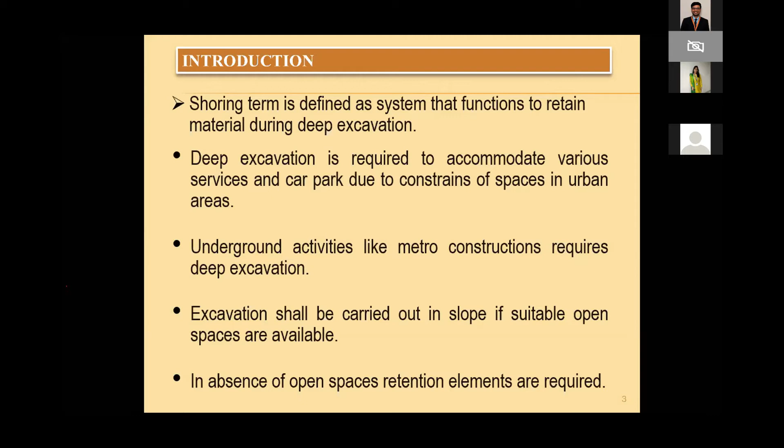As I said, in absence of that, retention elements are provided, means retention structures are required. So these are some of the photographs showing how the retention structures, or shoring as we call it, are required for the basement. You can see below the ground level it is excavated, and at the corner you can see this particular type of retaining structure.

Mostly they are in the form of a pile. In this photograph, this is called a panel. We'll discuss in detail. Here you can see this is mostly the structure in the metro stations, especially where we go deep and deep, and all the retaining structures' supports are provided from inside as struts. So these are some photographs showing the basements.

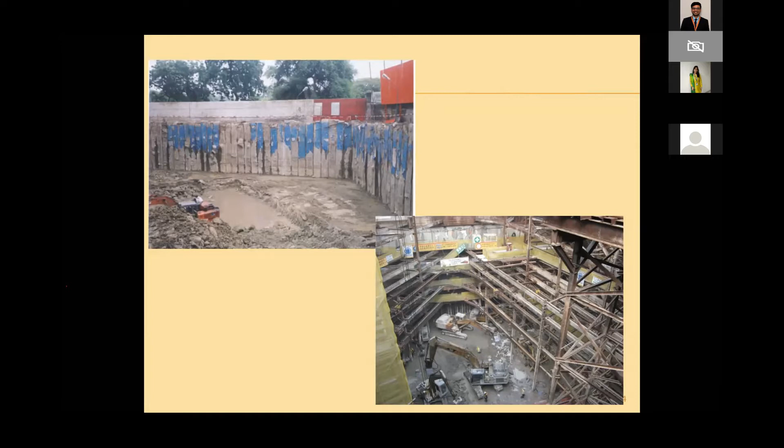See the schematic steps of this enabling system of construction, meaning how this is constructed. First, the entire boundary or area where we require the basement is outlined with the help of piles. So piles are driven, they are cast basically.

In Mumbai, mostly we use cast piles; driven piles are not allowed because of vibrations to adjacent structures. So first the holes are drilled to the required depth based on the strata and embedment, etc. And then the piles are constructed across the boundary, running across it. These piles may be of different types that we'll see - mostly touching piles or sometimes having some gap.

After the entire boundary is covered with piles, the excavation starts. You can see here, with this forklift type machine, the excavation begins. So once this excavation reaches the first level, then you'll find the first level of anchors are constructed.

You can see this is called the top level anchor, because it has to support the structure. As we go down, the free length cantilever portion of this pile, constructed in a row, is increasing. Sometimes when we reach another bottom level, another anchor level is required. In this figure I've shown only one anchor, so two anchors may be required depending upon its length.

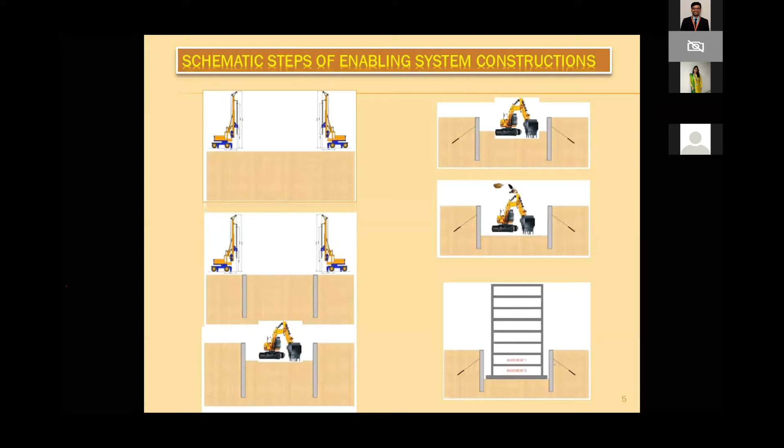And design. After the excavation level is reached, that is the bed level, then the foundation may be constructed - pile foundation or raft foundation. And then the building is constructed. So this is how the basement sequence is made.

You see, these are different types of shoring systems. First is called the soldier pile, and this is a very common and temporary type, not much used in big basements. They are also known as lagging walls, constructed by driving H beam or I sections.

Spacing varies about 2 to 2.5 meters or more. These are mostly cantilever, or sometimes supported. So they are purely temporary retaining structures - sometimes used to retain temporary backfills, to protect the structure, not really taking much load. And this is not permanent, so it has to be removed once the basement is reached.

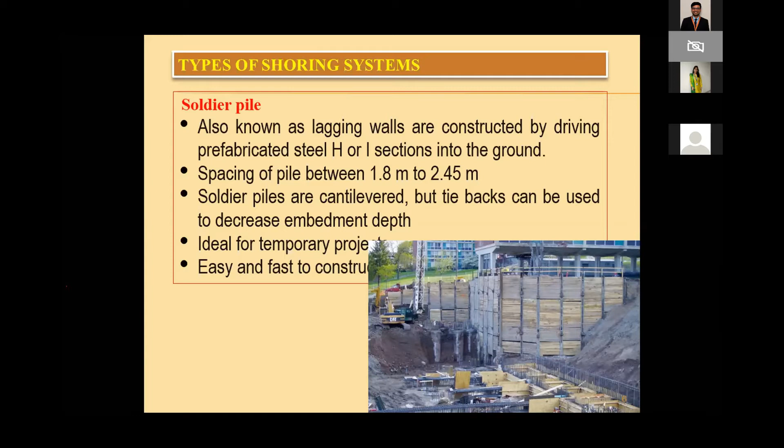Most of the time the depth of basement is very small in this case. You can see in the 3D also how these columns are injected, but they need foundations, and then a panel runs through this to support the backfill on other sides. That's why it is called temporary.

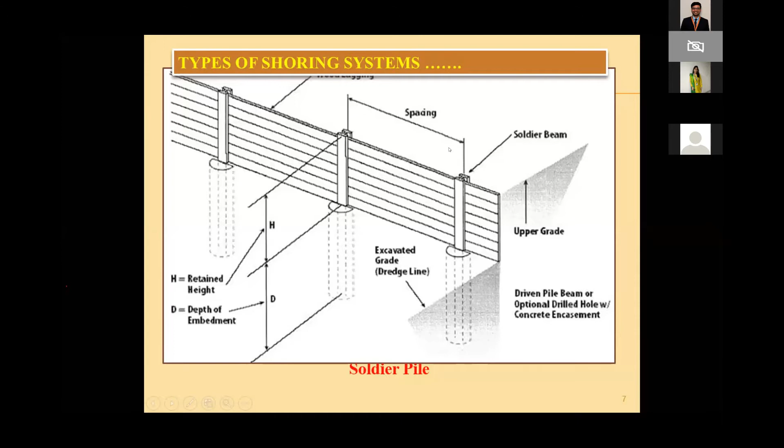The second pile type - this is also very useful and quite extensively used in metros, particularly in Mumbai. This is formed by constructing alternating primary and secondary piles. You can see the left side, bottom figure - first this unreinforced type, shown in the back side.

So you get another big void here, and this is continued across the length. Then again this pile tip is cleaned, reinforcement is lowered, and then the concreting is carried out.

After that you'll find that there is no gap between the primary and the secondary pile, or unreinforced and the reinforced pile. So it is completely watertight. This type of structure is used particularly when you require to restrict the flow of water.

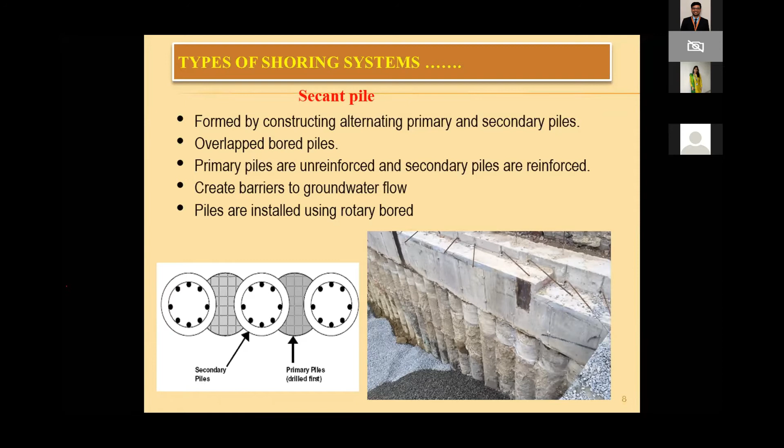Once you cast the pile, a capping beam, which is an RCC beam, is provided on top. It holds the position of all the piles, supported on every pile including the end pile. This is called the contiguous pile, also called tangent pile, or in local language, touch pile.

This type of shoring system is also very useful and is extensively used, particularly in regions where there is no groundwater table, or even where groundwater is present but the soil is comparatively stiff, like stiff clay or murum type soil, so the possibility of leakage is rare or very less.

Now here there is only one type of pile. First the hole is made. The minimum diameter is generally 300 mm, and maximum nowadays is also 1.2 meter. Mostly auger drilling is permitted in urban areas to avoid vibrations, and the adjacent pile is again drilled. Once drilling is completed for 2-3 piles, not all, the tip is cleaned, and then concreting is done quickly.

Nowadays RMC is used, so as soon as the holes are made, it should be refilled within 1 or 2 hours. Otherwise, loose soil starts falling at the base, which is called a soft toe, so you get a not-end-bearing pile.

So when you form this, for example a 300 mm diameter pile with center to center spacing of 400 mm, it means you get a clear gap between the two piles of 10 centimeters, 100 mm. In the photographs, you can see this 100 mm gap between the piles.

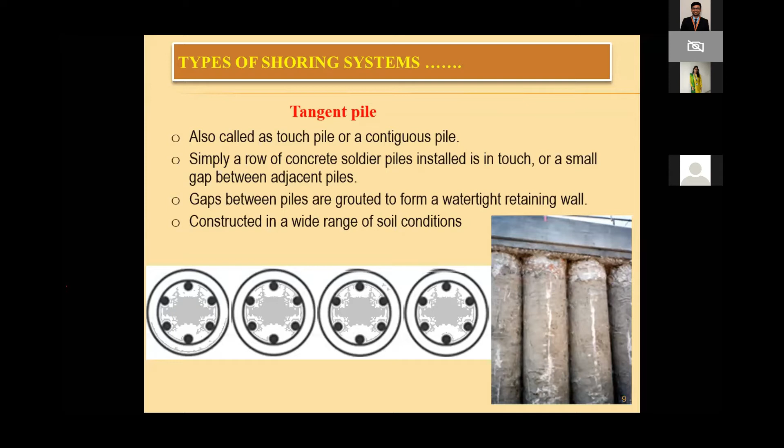You see the cross section of a single pile along with the anchor. These anchors are provided at a certain spacing along the length, maybe 3 or 4 meters, and they pass in between the two piles. A small portion, just the cover of the pile, is drilled — the cover is very high, 70 mm minimum required — and then an inclined hole is made.

The DTH machine or auger drilling is used, and then the tip is again cleaned, and reinforcements are inserted in this anchor. This hole is comparatively smaller — suppose the pile is 300 mm, then this may be 115 mm. After the reinforcement is inserted, it is concreted or generally grouted, because concreting may leave some voids.

The most important part is that this anchor should go into a rock level. In a soil level, if it is terminated in soil, it will not provide that much anchorage. So that is the necessity, and this is confirmed while drilling. The material which you get from that confirms that the anchor has entered the rock.

On the opposite side, once these anchors are constructed, excavation is started, and this is the basement level. The bottommost level of the pile is called the embedment. So this acts as a retaining structure along with this anchor, and they provide stability.

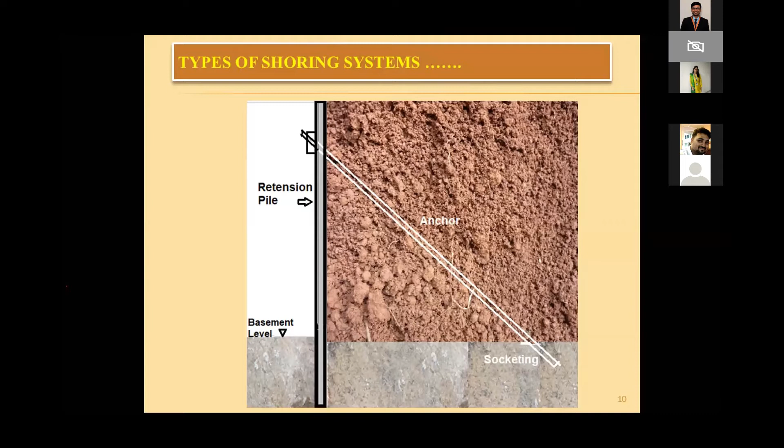Another type, very common and used since ancient times, is called sheet pile. The sheet pile can be a cantilever type or with support, called a bulkhead. These are the sections provided. Initially the alternate sections are driven, and for driving it requires a hammer, either a vibratory hammer or a gravity hammer, but that gives some vibrations.

So these are useful when a big infra project is in non-urban areas, very useful. But this system is also useful for water tightness, though comparatively the cost is higher. Second, for offshore structures there is a problem of corrosion, so concreting is necessary on the front side. So cost is one issue, and driving is another issue, particularly in metro areas, which is why this is rarely used there.

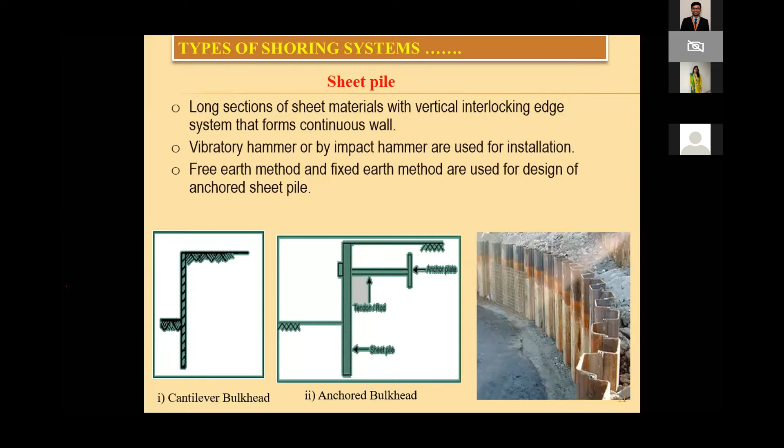Another way is like a diaphragm wall. It is just like a solid wall, as you can see here. It is a concrete or slurry wall, containing an RCC wall, constructed in panels, and it is totally water resistant. Another issue is that the depth may be a problem - generally 8 to 10 meters is sufficient, but beyond that there is some issue. This system is very useful when complete water tightness is required.

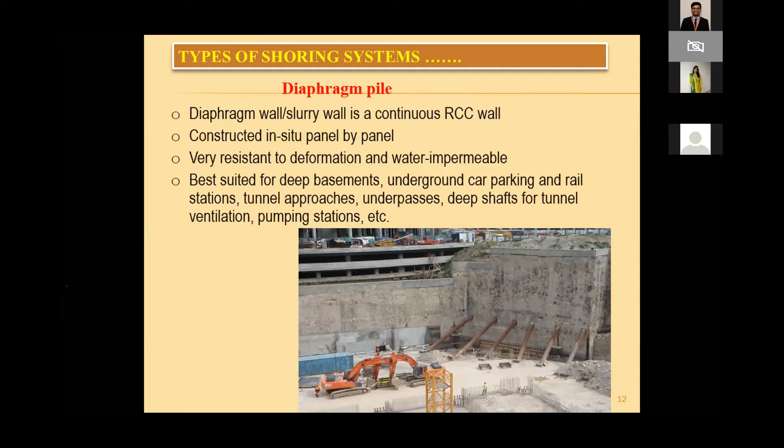This is the cantilever type of shoring. Earlier I showed the anchor, but here you can see there is no anchor. Generally the anchor is provided around 2 to 3 meters from this capping beam. This is the capping beam - it runs continuously, and these piles have a gap, so this is called tangent or touch pile.

But below, suppose this is the final level, then at least 1/3 is minimum required - of course it has to be designed, and it should go into rock. So it provides just like our fixed cantilever beam. On the right hand photographs you can see here, this brown color indicates there is a gap between the two piles.

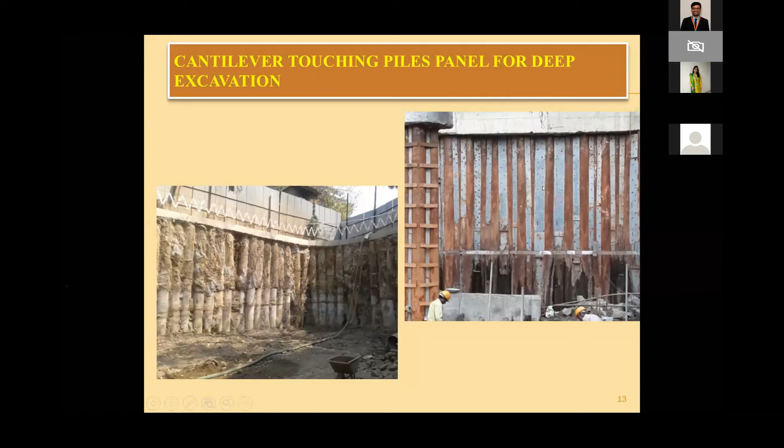Another type of construction you can see here is the cantilever meter panel. This concept was from the 80s and 90s, brought by a famous person, late Dr. V.T. Ganpule, who was a great consultant and was very much connected with academics also. He developed a system where instead of a circular pile, they use a small rectangle, a 1 meter panel. But the panel cannot go directly in a rectangular shape, so holes were prepared close to each other, their boundaries were cleared, and finally a void of rectangular section is available, then in-situ concreting is done.

This system was very famous at that time, particularly for storm drainage, to outline boundaries - this system was very useful because it's 1 meter, so it runs very quickly and is faster. In the rainy season, there was a possibility that storm water used to enter adjacent areas, mostly slum areas, with possibility of submergence. So to avoid that, this system was very useful.

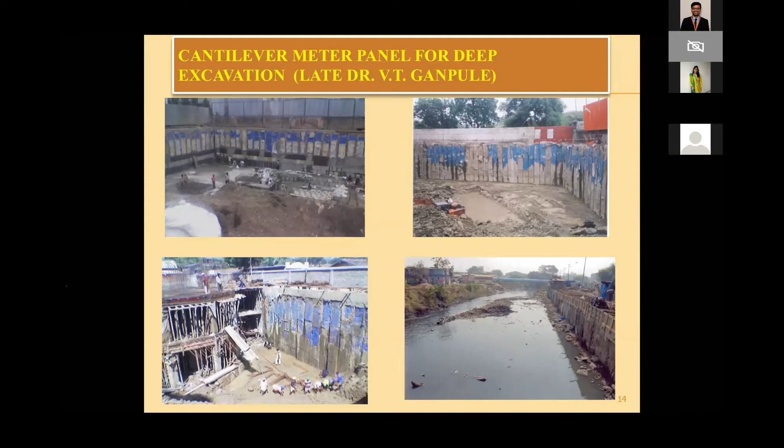This is the necessity: when we provide an anchor, there is a possibility that it may disturb the adjacent structure, particularly the foundation of the adjacent structure. Even though we provide an inclination, that possibility is always there. Nowadays many people and adjacent societies are aware about these anchors, so they do not allow it. Therefore, instead of providing an anchor on the back side, struts are provided at different levels.

At the top or at different levels, on the front side. The one disadvantage is that the mobility of equipment is reduced, so they have to design at least a minimum of 5 meters and more supports.

This system became very famous after its use in metro stations. All metro stations use a technique called cut and cover, where they use struts instead of anchors. Later on, we are also asking contractors and developers to use the same system because it provides safety to the adjacent structure.

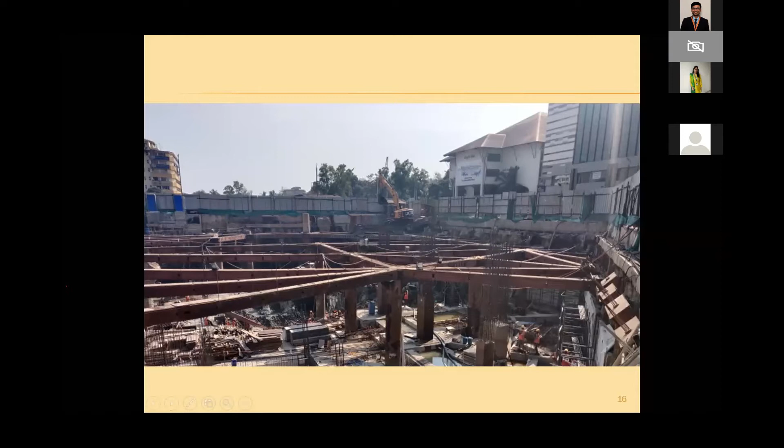Another way is the top-down panel method. This method is useful when there is already a part of a small rise area or hill type area, where at the bottom you require construction for a building. This was a natural cut with a stable slope, but to use that area up to the plot boundary, which may be at the top, vertical cuts were made, and panels are used to support that.

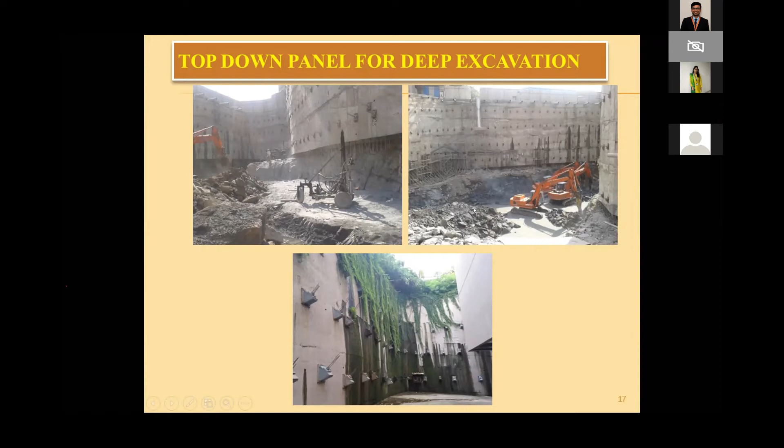I'll show you one case study which we did in Kalyan. There was already a society existing, and this was a small hill portion, with the adjacent boundary at the top. The developer wanted to use the entire area and did not want to keep a stable slope, because the plot area was already small and he could not sacrifice that area.

So we made a vertical cut, but a stepwise cut was made, and then cast-in-situ panels were casted here. One anchor, like a pin, was constructed here, and it goes to the opposite side without disturbing the foundation of the adjacent society.

The entire area was rock, maybe weathered rock and hard rock, so the length of anchor required was less, and you will find many anchors. From this boundary, the raft for the adjacent structure—this project is in progress.

So what are the challenges in these deep excavations? Restriction of movement—you don't have much space to move, particularly on the outer side you have very less space for mobility, and inadequate space for equipment. When you provide a strut, it reduces the space further.

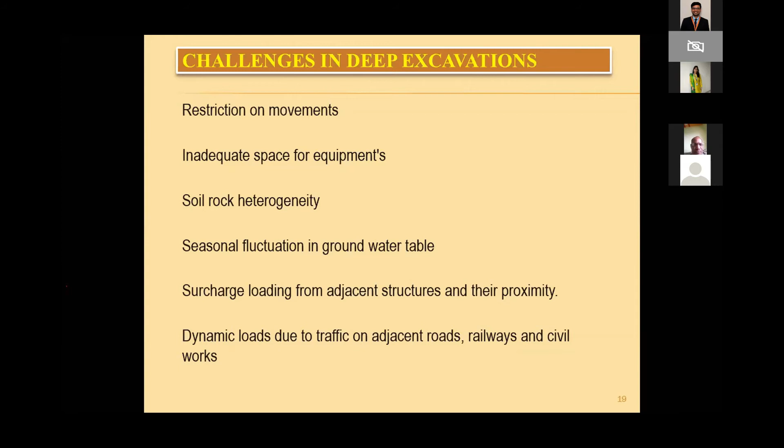Dynamic load due to traffic is also necessary to consider, particularly for basements adjacent to highways. Earlier there were double-deckers moving, which caused a lot of vibration to adjacent structures. So those forces need to be considered in the design.

This table gives a choice of system depending on the type of strata. When it is sandy or silty strata for the entire depth, the best way is to use a large diameter touching pile - you may use a 1 meter or 1.2 meter diameter pile. Then you can use a secant pile, as earlier we saw that with two piles together there was a leak. To avoid the leakage of water, this type of system is very useful.

When there is soft clay for most of the portion, secant piles are very useful, or diaphragm walls are very useful, because water tightness is the main importance, or large diameter piles are very useful. But the micro pile concept, meaning pile diameter less than 300 mm, is generally not recommended, because there are two possibilities: first is the flow of water, and second is the stability issue.

Of course, in all the systems, we require anchors. These anchors are also pre-stressed many times, so smaller sections are used which provide a larger pull-out capacity.

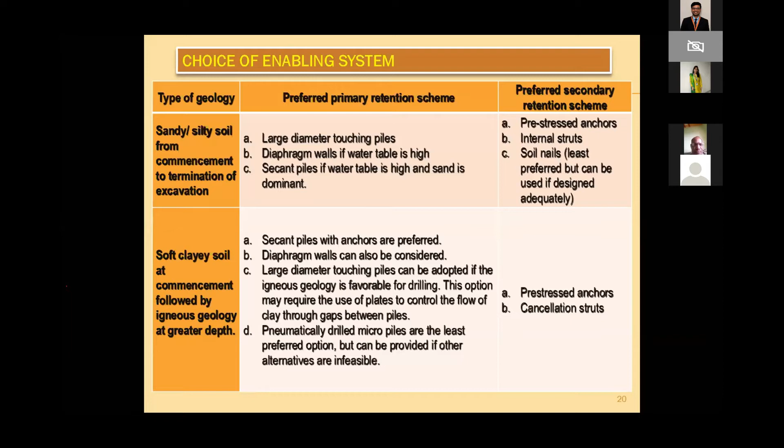Similarly, if it is a filled up ground for maximum depth, then pneumatically drilled micropiles are used. Here micropiles are used because water ingress is not important and the soil is like a stable ground. So therefore, smaller diameter piles are sufficient with the permanent anchor.

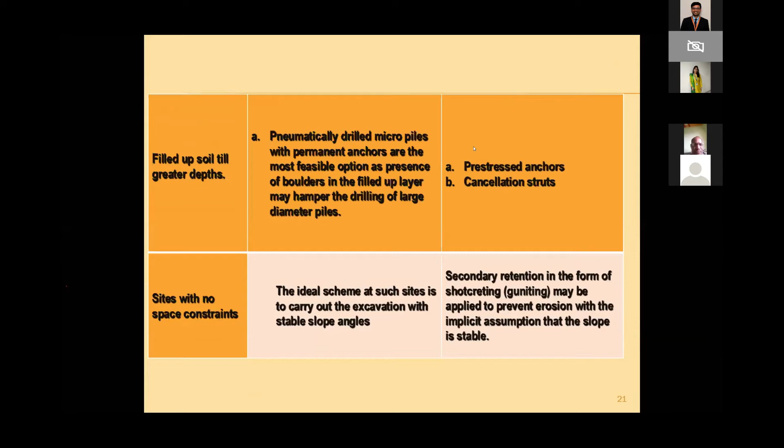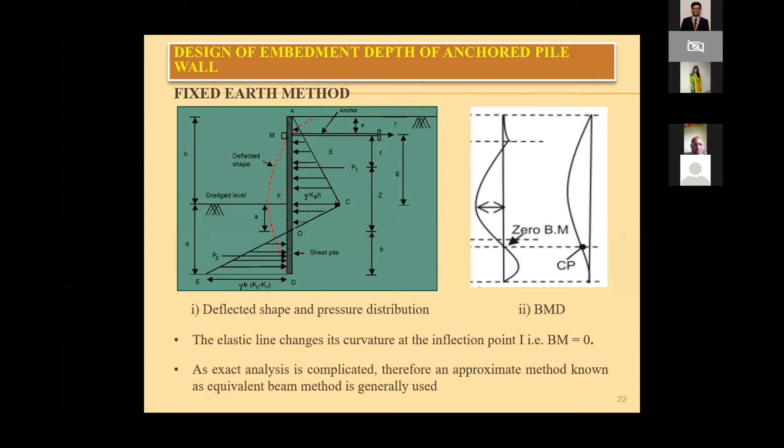If you see, the design methodology is very simple - the basic concept is in earth pressure, which all of you studied in your undergraduate curriculum, like the concept of sheet piles. It may be cantilever or with a support. This system is already a very simple one - analysis is given like active pressure and passive pressure on opposite sides, and a deflected diagram. This is a basic part of the curriculum, the concept used for finding earth pressure, lateral pressure on the shoring system. So all these concepts you already know.

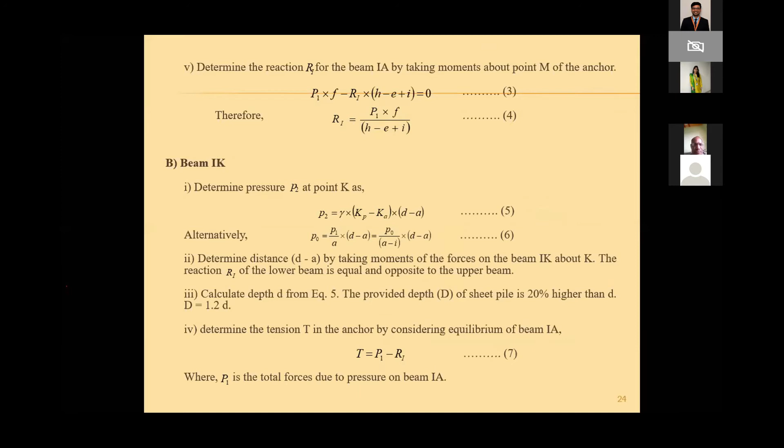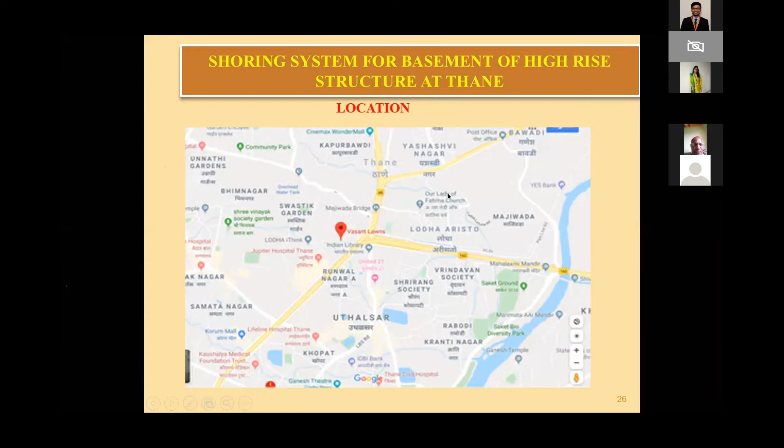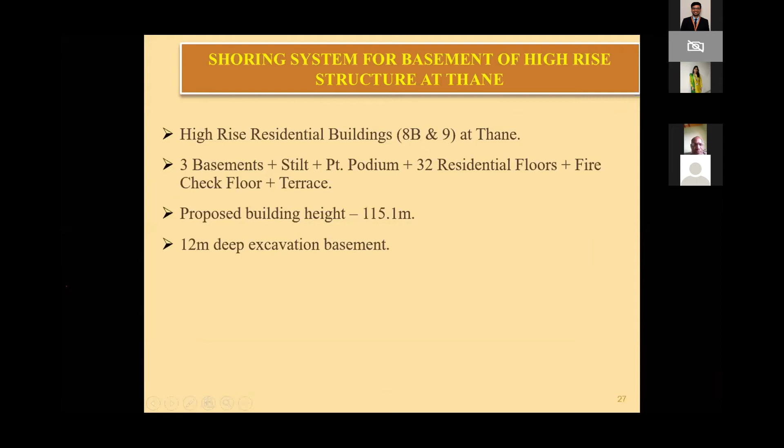So now we'll move to the first case study. This is a case study near Majiwada junction in Thane, for a high-rise structure. Height is around 32 residential floors with 3 basements, meaning around 12-meter depth basement is required. And these are the details for the shoring pile.

Its capacity was designed to 85 ton. There are 2 level anchors, first level and second level. The diameter of the drilling for the anchor was 115, smaller diameter, with free length of 5 meter and 7 meter.

That's why the fixed length is very, very important, and it must go to the rock for anchorage. Many failures were observed when this fixed length was in the soil, because that doesn't provide the necessary bonding or bond stress, and therefore there are failures.

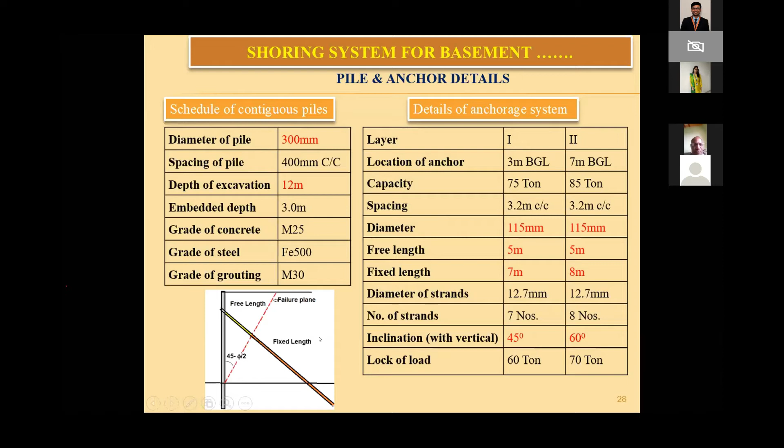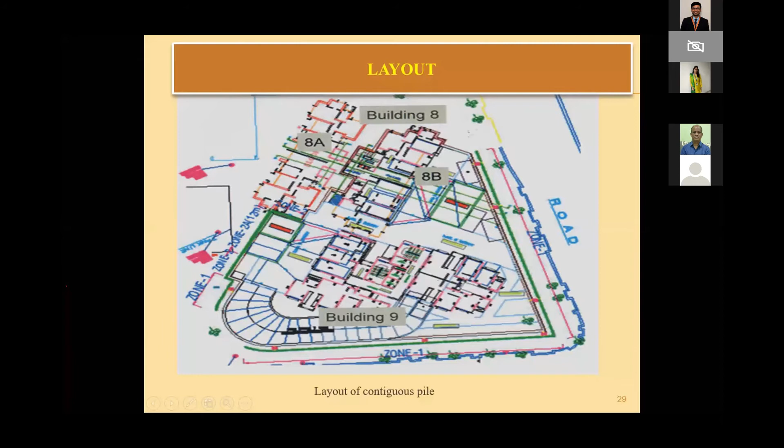layer and second layer. Mostly the first layer is filled up soil. Second layer may be weathered rock, murum, or clay. So as this length is more, therefore 2 level anchors are required.

Now why is this first level anchor necessary? Because even I can design the system with 1 anchor also. But it is observed that because of rainwater, which produces some dynamic effect, there are cases that this top portion of 2 or 3 meter failed in shear. Literally it broke into 2 pieces, where the bottom pile is in intact portion.

To avoid that, the first level anchor we generally encourage to provide at 2 to 3 meters.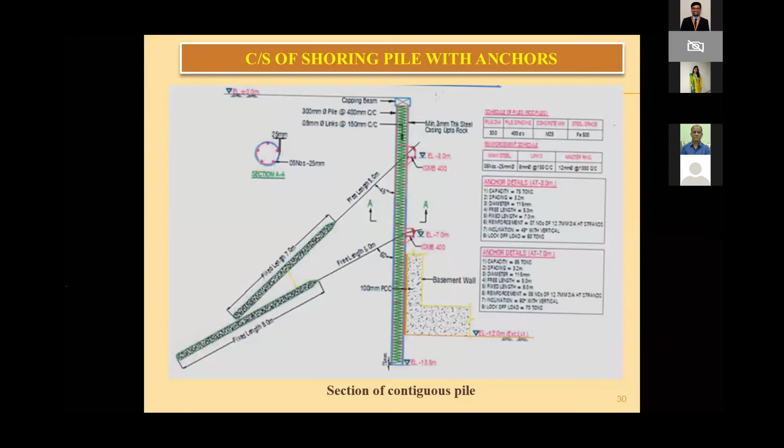So total 6 and 7 boreholes were drilled. You'll find one special thing: these are the old boreholes, 15 meter, and one borehole goes close to 30 meters. Why like this? Because in the old guidelines, 15 meter was sufficient for borehole drilling for the investigation. But the new code has come for tall structures, like 16700, and there it is mentioned that the investigation must go up to 30 meter.

So therefore, we ask the contractor or developer to at least have some pile, or additional boreholes, which should be close to 30 meter because of the requirement. So if you see this borehole, the top portion is filling up to 2 meter, and then murum type for 1.5 meter. Then the weathered rock starts after 2 meter.

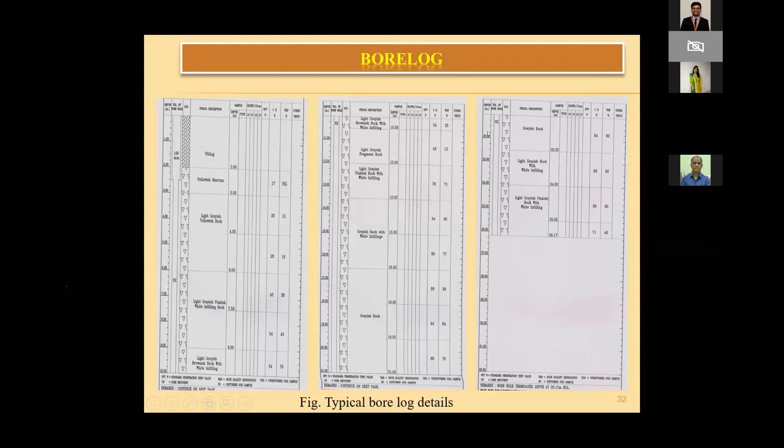So there are multi layers, but for analysis we consider the first 3 layers. The first layer is the fill, then second is the highly weathered rock, and third is hard rock below 7.5 meters.

For hard rock, you can see the capacity is very high, 216 kg per cm square. Its density is also very high. Another important part is the porosity - the voids in the rocks are very less, so this gives you lesser permeability. The leakage will be less, definitely.

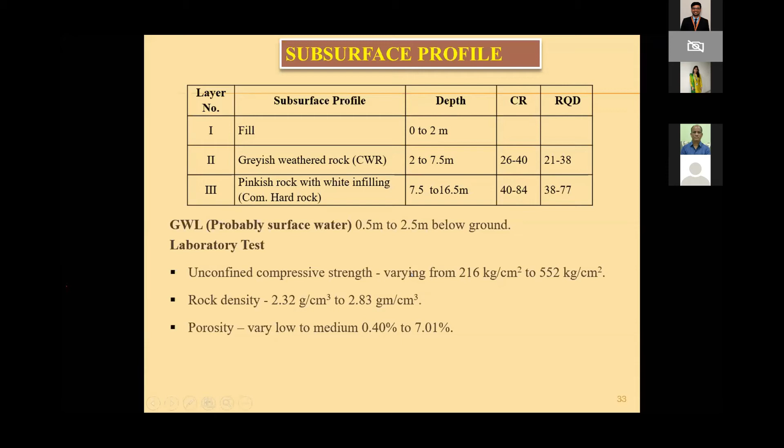Now for the analysis purpose, the entire profile is divided into 3 layers: filled up soil, then highly weathered rock, and third is hard rock. The most important thing is the modulus of elasticity, which is increased 10 folds or more than 100 folds.

Poisson's ratio, you'll find as it is soil and fragmented rock, very high, but with highly compact rock, it is very close to concrete, 0.2. So if you see, the strength is very high for hard rock.

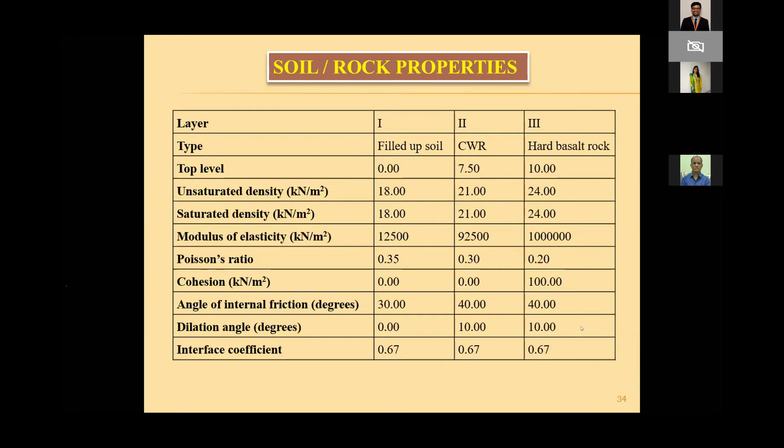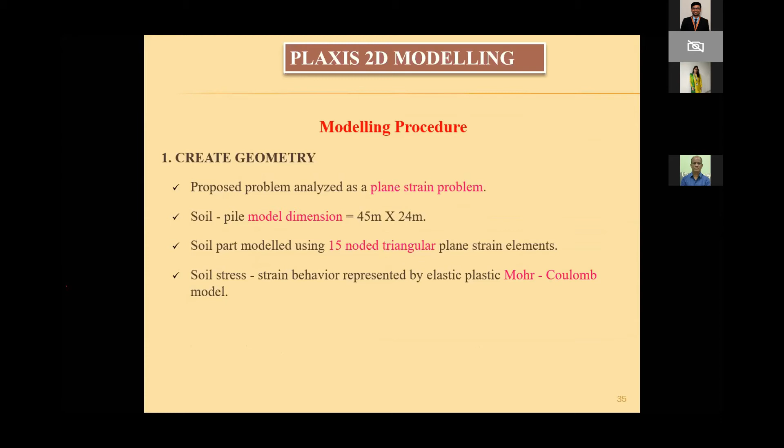Modeling procedure - here we use software, basically Plaxis 2D modeling is used. Total area considered, called a continuum, is very huge, 45 in horizontal direction, 24 in vertical direction, and triangular plane elements with 15 nodes were used. Mohr-Coulomb concept was used, and you can see this modeling.

These piles are very close, so they form like a plate element for the entire length of the plot, so it is considered as a plate element. Anchor is considered as a node-to-node element because these anchors are at a certain horizontal spacing of 3 to 3.5 meters, whereas these piles are continuous, with a gap of 10 centimeters.

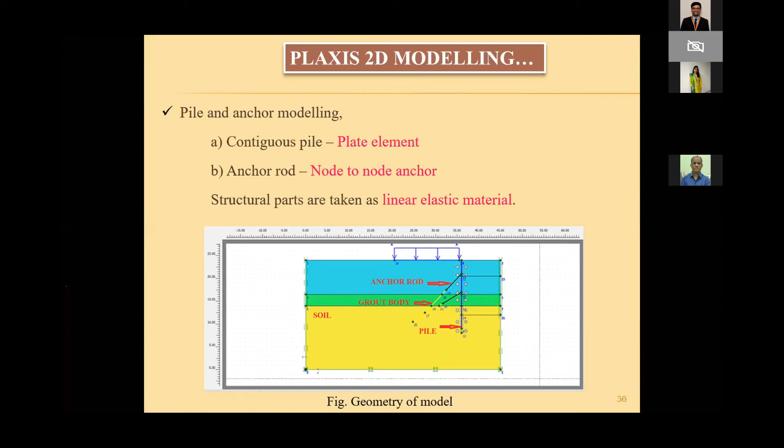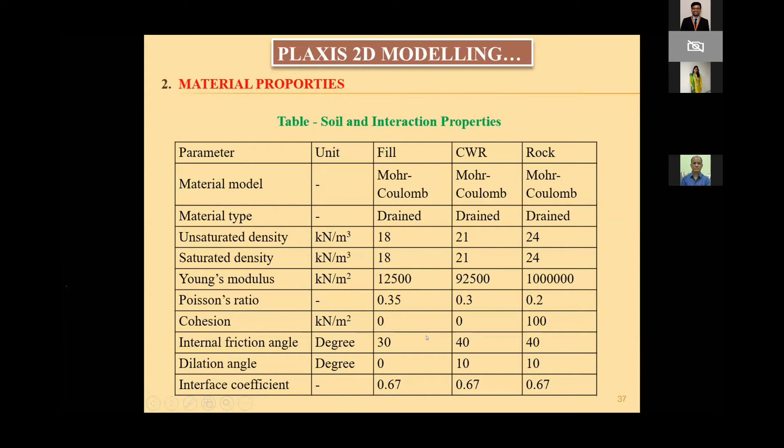So further details from this software point of view, the modulus, Poisson's ratios, and all these details - these are the inputs. Further details for the anchor, you can see the anchor also.

It is mostly the material used - it's elastic, but the material used here in this case is grout, and we call it GP2 grout. These anchors are spaced around the horizontal direction, 3.2 meters center to center, and 2 level anchors.

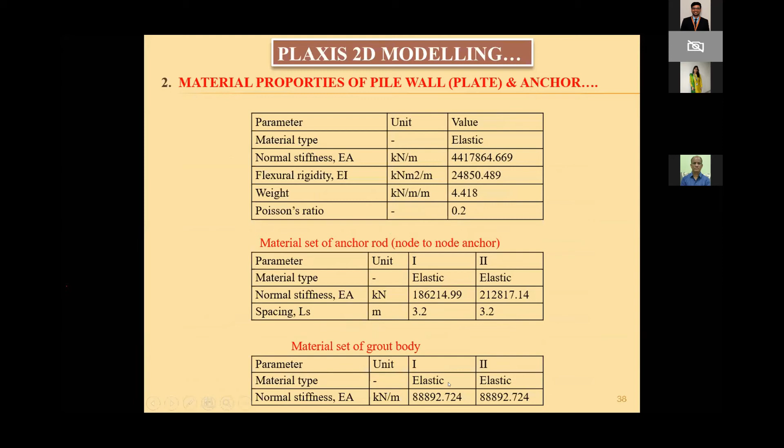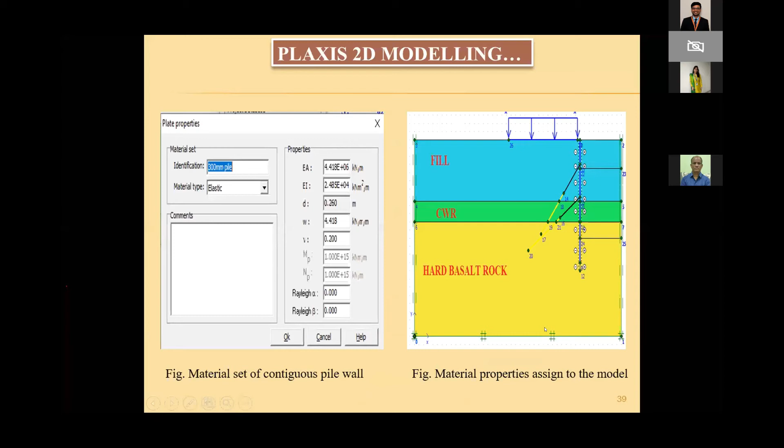So these are the further details for this grout body, and this is how the geometry is first given, and then material properties given - first geometry, then material properties are given to the pile, anchors, and the soil. Then interface properties are given.

That is very useful, but what is the advantage here? The Plaxis 2D is very user friendly - automatically it adjusts the interface property. Therefore not much expert person is required; a general person can also use it and do this design.

This software, 2D and 3D, is also available nowadays. Almost all consultants have this, but unfortunately the institute does not have this because the cost is very high, more than 15 lakhs.

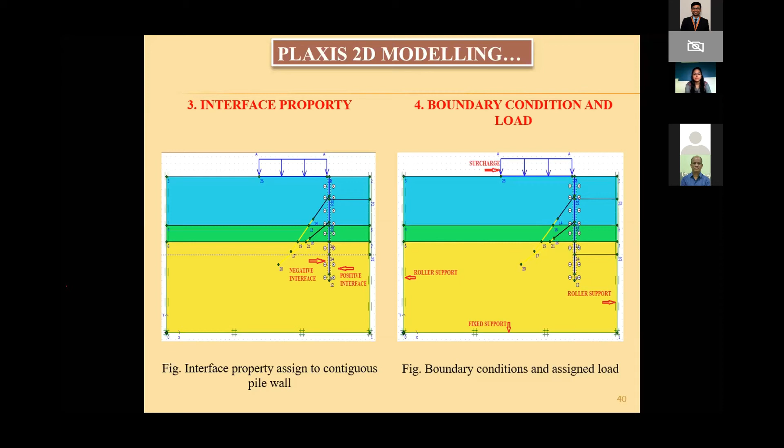Now how many steps are there? The steps are exactly the same as a construction sequence. Okay, how this meshing is done.

First, the piles are installed along the periphery, and excavation is done up to the first level, like 3 to 3.5 meters, and the first level anchor is constructed. Then excavation is carried out again below that, up to 7.5 meters, and the second level anchor is constructed. Then excavation is completed up to the basement level, that is 12 meters.

This pile was earlier terminated around 13.5 meters, so this was the embedment. The support to this pile is this embedment and these two anchors.

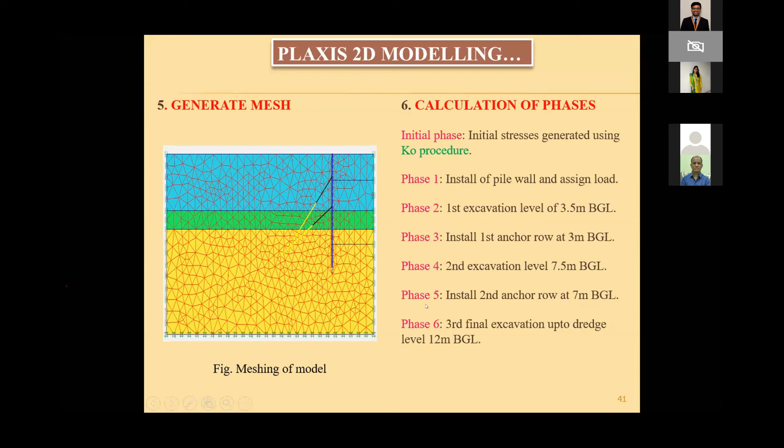This is pile displacement, and how it varies with and without the water table. This is a very important issue, particularly because many people do not consider the water level since they don't find it during investigation, or sometimes they consider a water level but actually it is not there. Many times in Mumbai and Thane area, we get surface drainage, which may not be actual groundwater. So for that, you have to test this for 24 hours.

You have to remove the water and then check the borehole after 24 hours. If it's completely filled up, then you can say it is a groundwater table. Because of the water table, the huge water column exerts pressure, and that adds to the pressure and displacement also. So you can see 91 mm displacement at the top, and when there is no water table, it is 70 mm.

Now this displacement, you may feel is very high. Yes, it is very high, but it is a system on which there are no vertical loads, only lateral loads, and this is to retain the boundary. So therefore, from a serviceability point of view, 100 mm is generally considered sufficient. It also depends on how much space is available, the backfill type, and other sides.

If the adjacent boundary is there, then this has to be restricted up to 50 mm. If it's an open plot with open space in the surrounding, then you can have more deflection also.

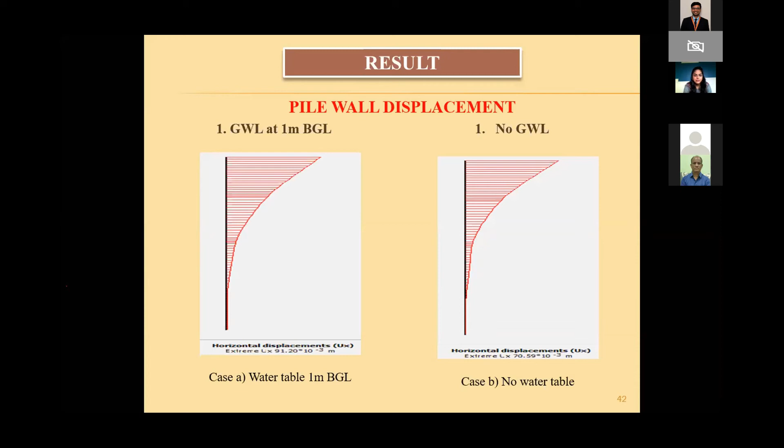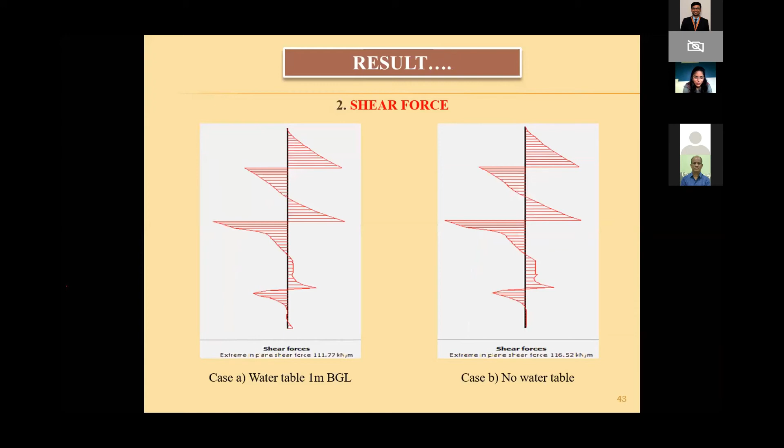Similarly, sir, you can... yes, okay. Hello sir, hi, I'm very sorry to interrupt. Yes yes yeah, can you wind up in next 5 minutes? Okay, I'll take 10 minutes. Okay sir, take a 10 minute stop, then we'll proceed for the question answer session. Okay, thank you. Okay.

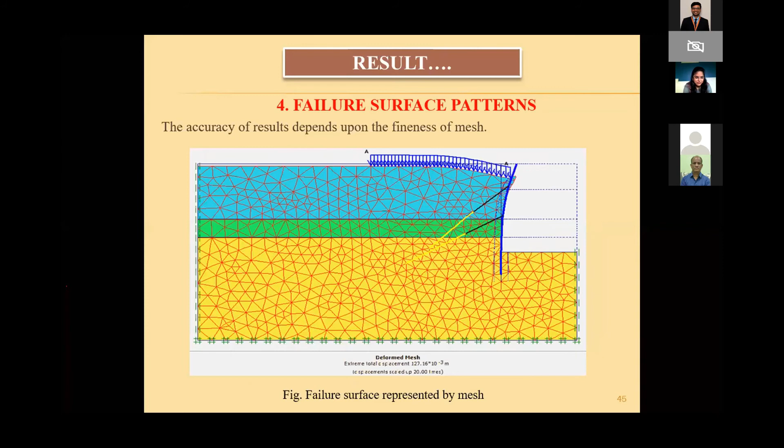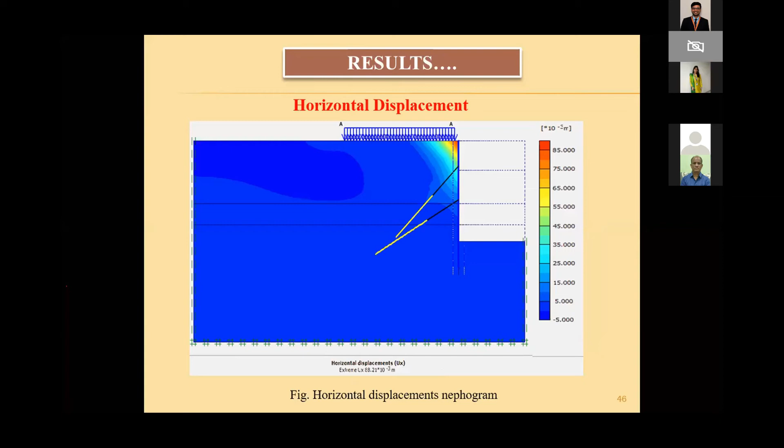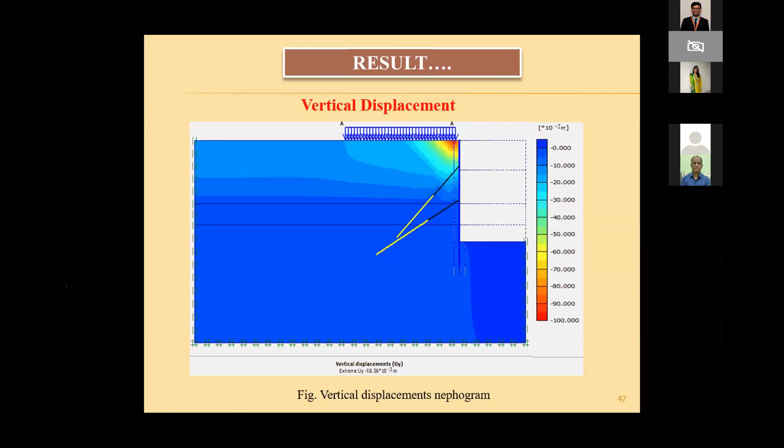As there is a lateral displacement, there is a vertical displacement also, so this value is less, you can see at the top. These are the details showing the maximum displacement at the top, where the shear force and bending moments are maximum along the length of the pile, up to the termination level.

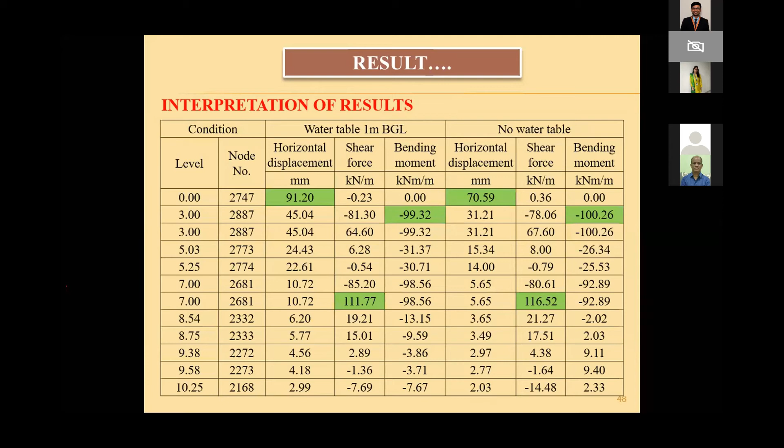Okay, now we'll move to the second case study. This is a case study, this is not for shoring, this is for the foundation. You can see this is in the Dadar area, very close to the Shivaji Park area. This is here, Shiv Sena Bhavan.

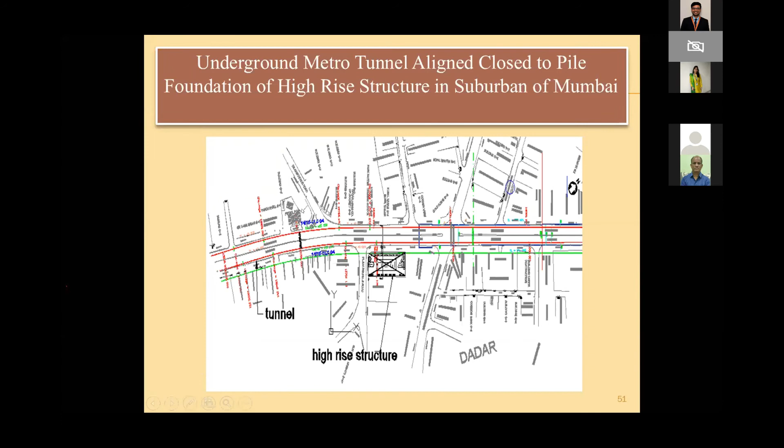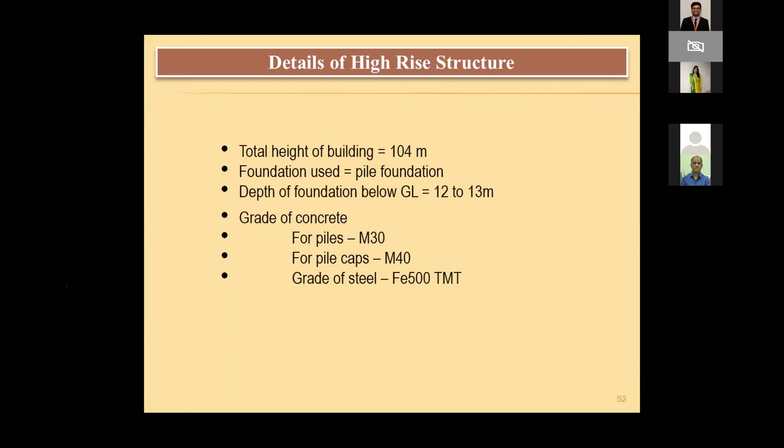This red line indicates two metro tunnels already in place. This structure is around 100 meters height, around 35 floors. So it is very close to the tunnel, and here the question was whether the building will transfer load onto the tunnel or not. That we have to check. Piles used are 600 to 1200 mm.

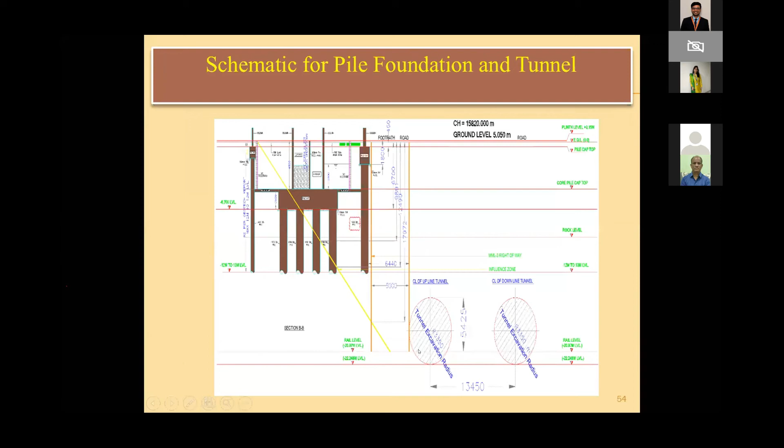Now this is the picture, you can see these two tunnels are very close, 3.3 meter radius, and the clear distance is 6 meters from this project. Vertical clear distance is 3 to 3.5 meters, and rail level is at the bottom. You can see there is sand at the top, and because the other portion is very close to the sea, you'll find there is water and sandy levels. Rock is there up to 9.5 meters below.

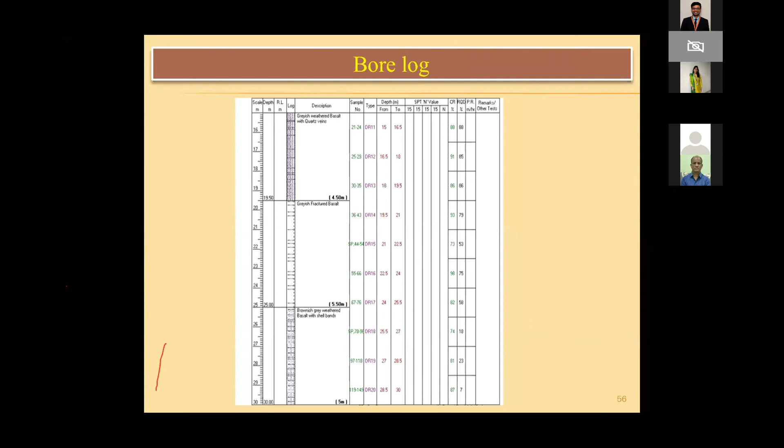There was no basement, but it was necessary to have the pile. No basement allowed because of the tunnels. Here, Abaqus was used instead of Plaxis because this was like a research tech level project. Abaqus takes a very huge time, this required around 3 to 4 months as compared to ready-made software.

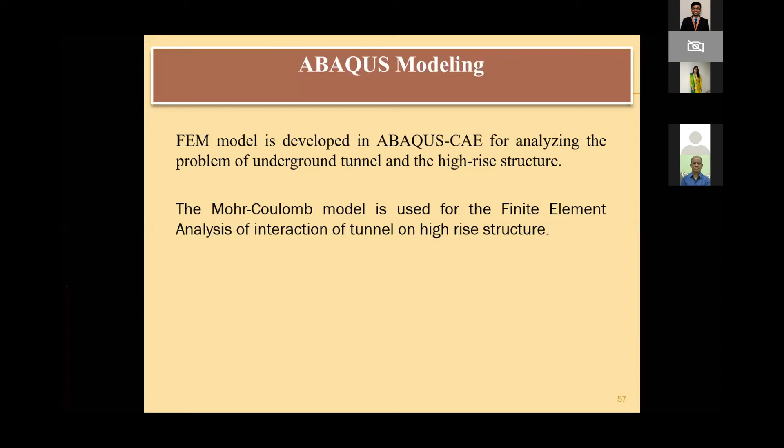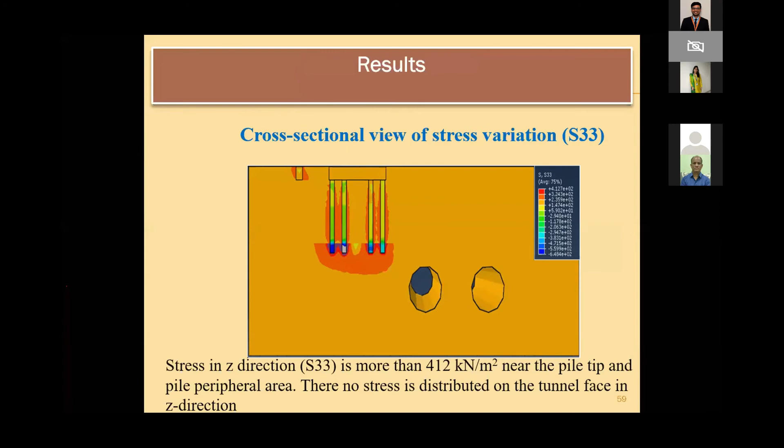So the stress developed was 412 kilo Pascal, and you can see it is at the tip but not interacting with the tunnel. So that was the advantage. So these metro tunnels were safe, because of this proper structure.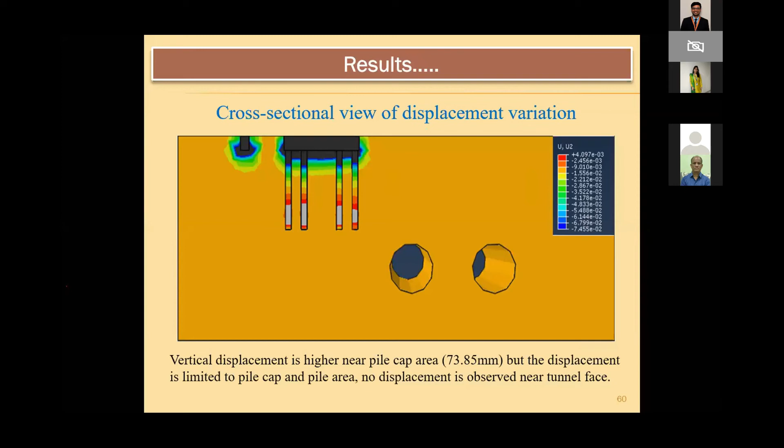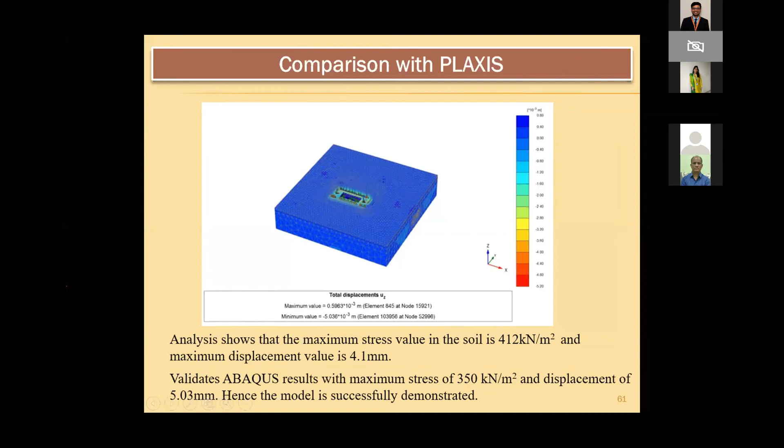Similarly, displacement is maximum at the top because it is in the soil, and minimum at the bottom. Again, there is no interaction with the tunnel. This was also compared with consultant software, Plaxis, and it was observed that the displacement is quite close, 4 mm and 5 mm. So therefore the result was there was no much interaction with this.

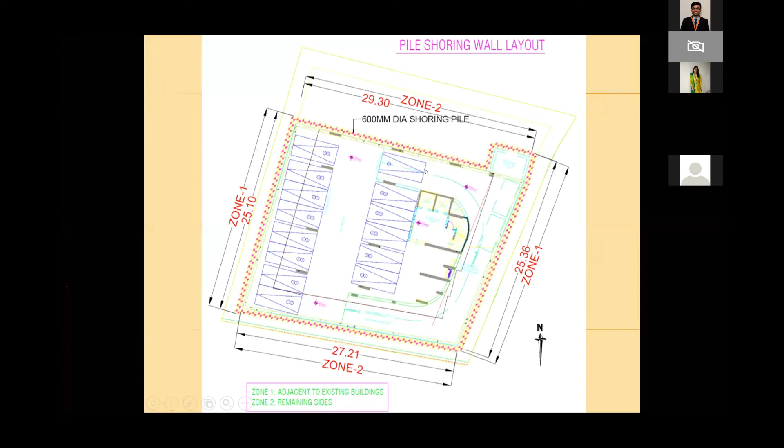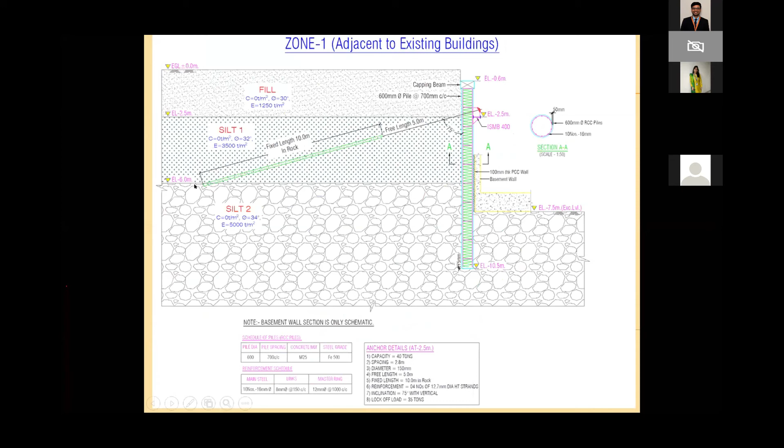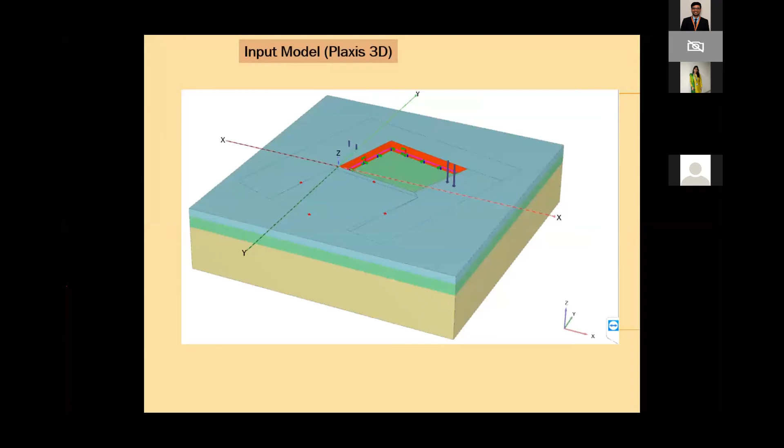So you can see the cross section. This is the basement, 7.5 meter, and the shoring piles up to 10 meter, and the anchor. It is quite a flat anchor because sufficient space is available. Another view, and here the 3D Plaxis is the advantage. You can see that it is modeled in 3 dimensions, with anchors in all directions behind this also.

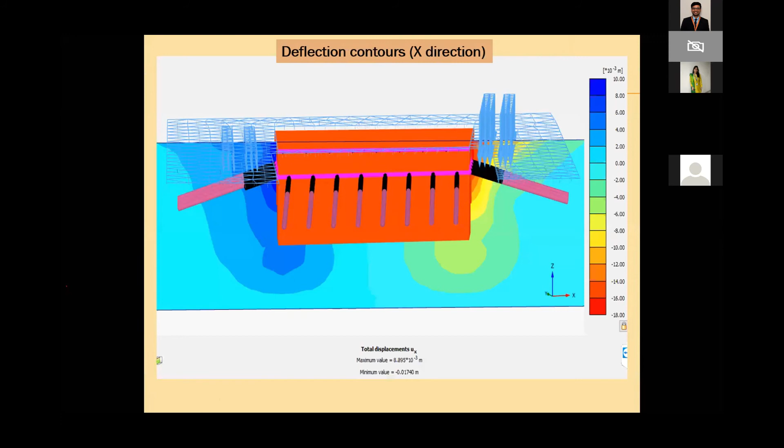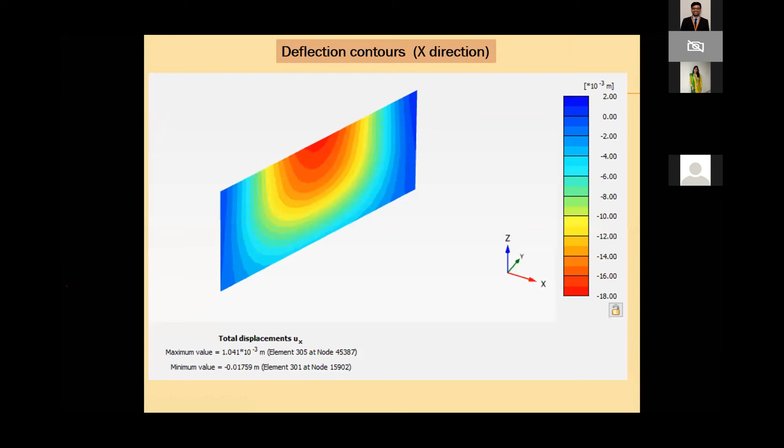Okay, this is the x direction movement we'll see in the 3D. The advantage of 3D is that you get actually maximum deflection in the center and less at the ends, which is something we miss out in the 2D. You can see the deflected shape. Here maximum is 17 mm at the top, and it is at the center and less at the ends. So this clear picture you get in the 3D.

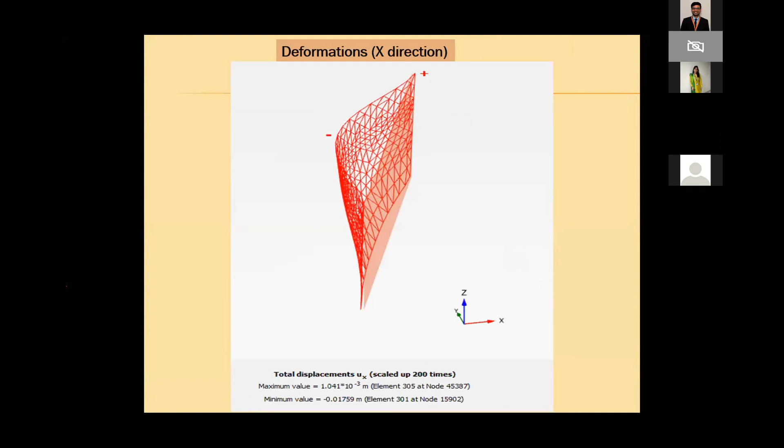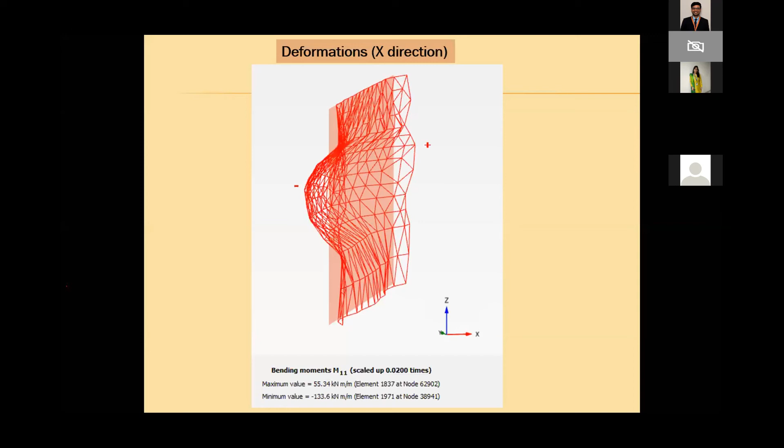Similarly, the bending moment is maximum in the center, minimum at the bottom. And for the bending moment also you can see the 3D. So this gives the advantage of reorientation of your anchor spacing. That is the advantage. Okay, so this is the general conclusion on that.

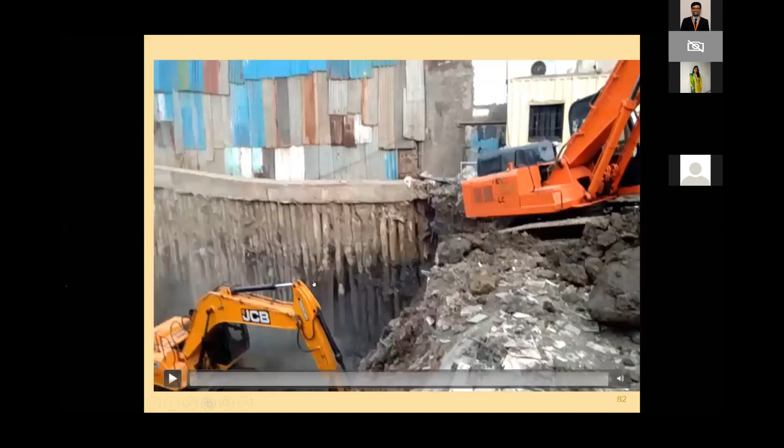Now I'll try to show this and wind up. There are many failures that take place. I'll try to show you a video of how a failure took place. It was last year in central Mumbai.

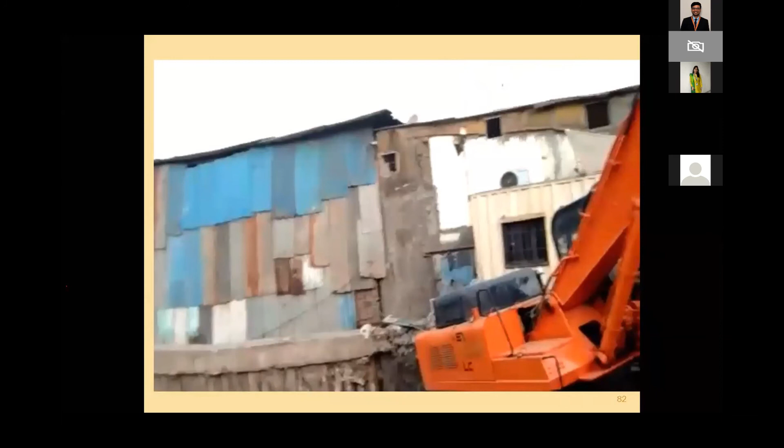You can see this, the piling. There is no anchor provided in the pile at the top. Okay, you can see it is already moving. You can see it is moving, it is bending. Okay, and this labor camp was evacuated, machines were also evacuated, and then there was the failure.

I'll just fast forward this. See, you can see now, again it is bent. You can see the ring beam, the capping beam, you can see it is further bending, and you can see the crack in the capping beam at the center, and the soil is going out, and it's quickly going to fail now. You can see now it's going to fail shortly.

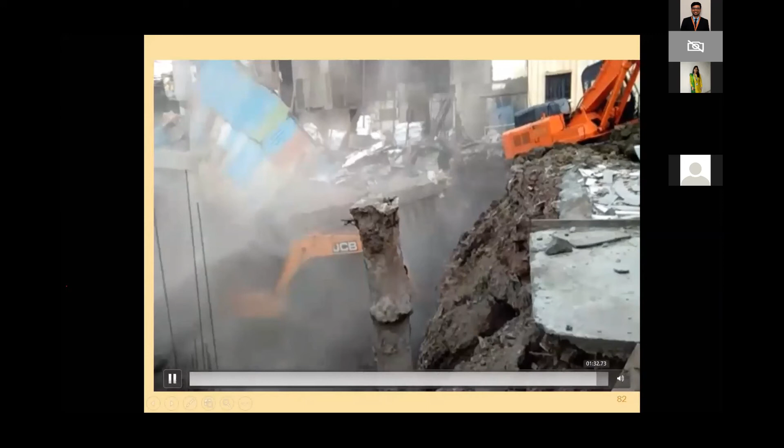You can see the failure is at the center. You see the entire failure, it is in the central part, not at the end, because first of all there was no anchor provided. That may be one reason, or it was designed but maybe the developer missed it out.

Okay, so these are the general conclusions. What are the most important things we should see in shoring construction? Anchors are necessary. When pile length is generally greater than 8 to 10 meters, the first level anchor should be provided within 3 to 4 meters. In the earlier case, there was no anchor and it failed because the cantilever was too much. Struts are necessary on the opposite side when there is no possibility of providing anchors.

Secant piles are very useful when you want a water tightness system - no water is allowed in the basement. 3D analysis is actually useful, which can reorient your design system.

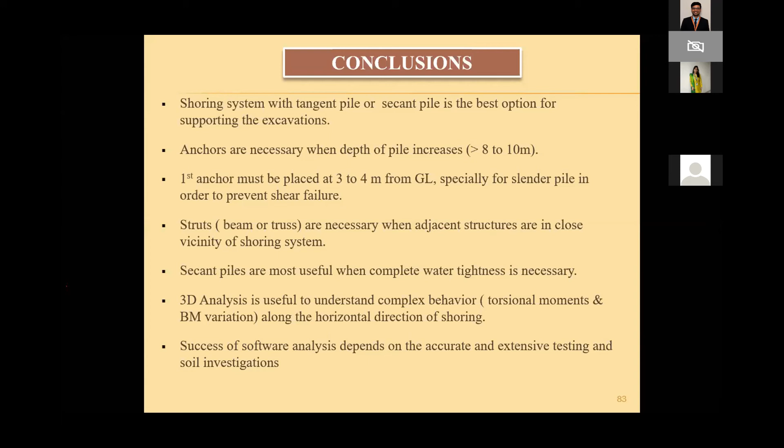Any software's successful operation depends upon accurate, extensive testing and soil investigation. I must thank my colleagues who were also consulted and involved in these projects. Mostly they are high-rise projects, and they are leading persons from Mumbai who work there and all over India. Thank you.

Thank you, sir. We are getting very much appreciation for your session. Each and every participant is saying that the session was very informative. Thank you very much. There are many questions, so shall we take the question answers?